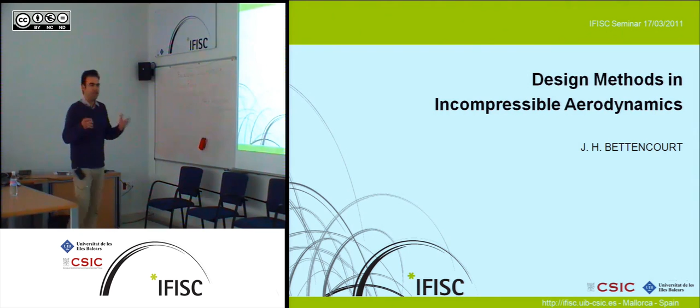Of course, aerodynamics is a very wide research topic, and these design methods are basically what people use to gather research results and make something workable out of it for the design environment. There are 100 years or more of research that's impossible to squeeze into 40 minutes, so I'll just talk about the basics, especially these potential flow methods that are quite old and quite simple, but they are very useful. They've proven to be very useful.

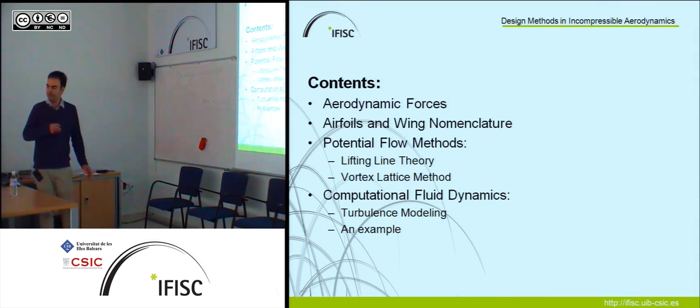Lastly, I'll talk about computational fluid dynamics, which is now a hot topic in aerodynamic design. I'll talk especially about turbulence modeling, because it's like the Achilles heel of computational fluid dynamics. Then I'll finish with an example.

Of course, the problem in aerodynamic design—and I'm a naval engineer, so I work mostly with propellers and ships—but I chose aerodynamics because the equations and methods are the same, and there turns out to be a lot more material on wings and such devices than on nautical applications.

So the problem with aerodynamic design is that we want to find the forces acting on this wing. Here is the cross section. We want to find the forces acting on this wing when it's subject to an airstream with velocity v, at an incidence angle that we call the angle of attack, called alpha. The resultant force is this vector r here.

But in aerodynamics, it's usual that we decompose this r vector into two components. One is parallel to the velocity stream, called the drag, d. The other is called the lift, and it's normal to the velocity stream. The lift in an airplane is what keeps it flying, and the drag is what we pay for if we want to fly it.

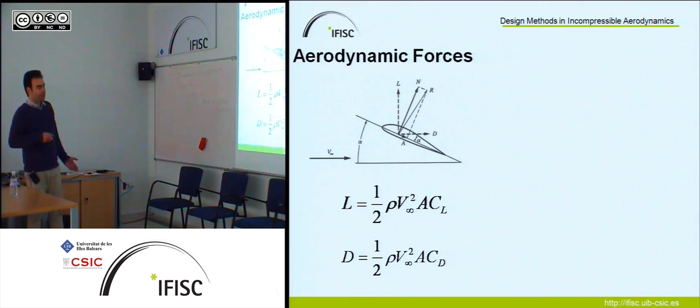If we use dimensional analysis on this problem, we find very simple expressions that relate these two forces to the parameters of the flow and to the shape of the wing. These forces are directly proportional to the density of the fluid, to the square of the free stream velocity, and to the area of the wing, both for lift and drag. But they're also directly proportional to two coefficients that, as it turns out, are the tricky part of these equations.

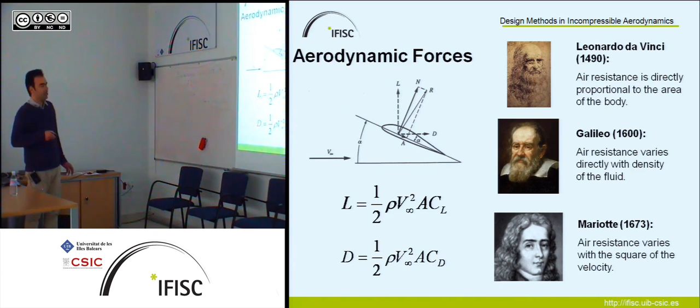Before I go on, I wanted to give a little historical note. We can start, as always, with Leonardo da Vinci, and go all the way up to the 17th century, where scientists were already more or less in agreement about these three terms. Of course, a lot has been done since, but to this day it's still difficult, still tricky, to calculate these two coefficients directly.

Now I want to show you why. These two coefficients depend on the pressure and shear stress distribution over the wing surface. The lift coefficient and lift force depend more or less solely on the pressure distribution. You can see here the physical mechanism of lift, due to the pressure difference between the lower part underneath the wing, where you have high pressure, and above the wing, where you have low pressure. This is called the pressure face, and the top of the wing is called the suction face. This pressure differential creates the lift on the wing.

Of course, we also have this shear stress distribution, which is the stress from the friction of the fluid over the surface. That mostly depends on what's happening in the boundary layer, this very thin region on the surface of the wing where viscous effects are important. So what happens here more or less determines this shear stress distribution.

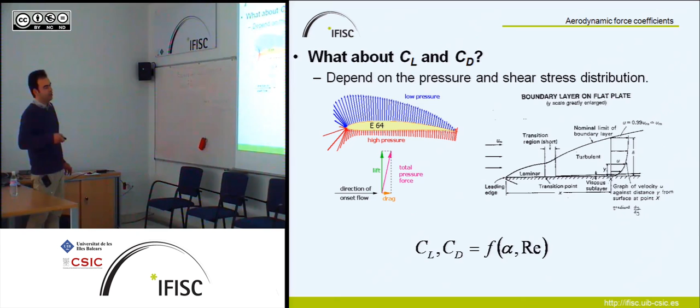Now, to ease things up a little, if we do the dimensional analysis, the same as we did before for the forces, we'll find that these two coefficients are functions of the angle of incidence, the angle of attack, and the Reynolds number. This Reynolds number is mostly related to this part, while the angle of attack is related to both.

Now, before we start, I'd just like to talk about nomenclature.

There is another important parameter about this planform of the wing, which is the aspect ratio, and it's just a measure of how elongated the wing is. And it turns out, as I'll show you later, that it is very important in aerodynamics.

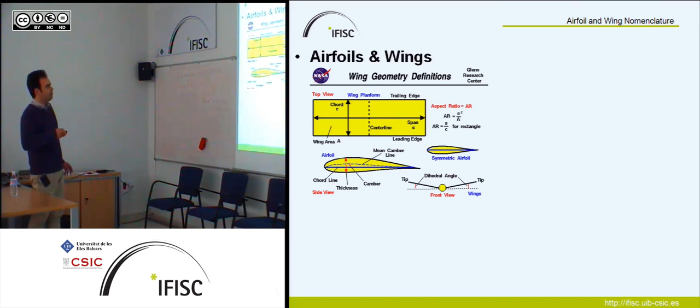Now about the airfoils, they're defined mostly by their thickness distribution. It's the distribution of the thickness around this chord line, and also by the camber, which is just a measure of the curvature of the airfoil. Higher camber means higher curvature.

Okay, now just a short note about how these force coefficients vary in an airfoil. I told you they were functions of the Reynolds number and the angle of attack.

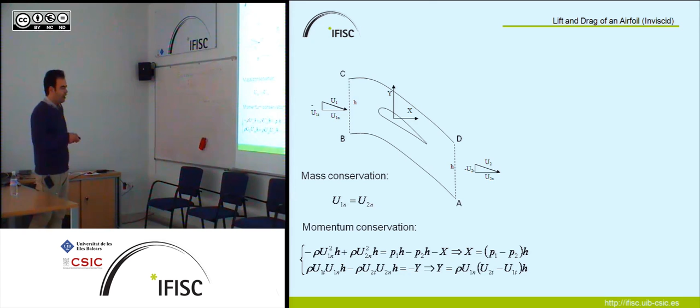If I apply momentum conservation in the x direction, the momentum transport cancels because these 2 velocities are the same, and all I have left is the difference in pressure force, which gives the horizontal force. For the vertical part, since the pressure terms cancel out, I'm only left with an expression that is just the force generated when the flow turns to pass around the airfoil and leaves. If I'm going too fast, please ask me any question.

Now that we have these 2 expressions for the lift and drag forces on the airfoil, I'd like to get rid of these pressure terms by using Bernoulli's law, which is just the conservation of energy along a streamline. I can use this to replace the pressure terms with velocity terms. Now I'm going to define mean velocity components, the mean of the normal components and of the tangential components, and with this I get two expressions for the forces purely in terms of velocity.

Now I'm going to introduce a very important quantity in aerodynamics, called the velocity circulation. The velocity circulation is the integral of the velocity vector along a closed contour encircling, for instance, the airfoil. If we apply this integral to this configuration, we get an expression I can use to replace the terms here, giving a useful result: the horizontal and vertical forces are just the density times the mean velocities and the velocity circulation.

Okay, now we're getting close to where we wanted. So now I'm going to introduce a very important theorem in aerodynamics called the Kutta-Joukowski theorem. We now have these forces, a vertical and a horizontal one, but in the beginning I defined aerodynamic forces in terms of their orientation with respect to a mean velocity. So now I'm going to express these forces in an axis system that is parallel and normal to that mean velocity vector.

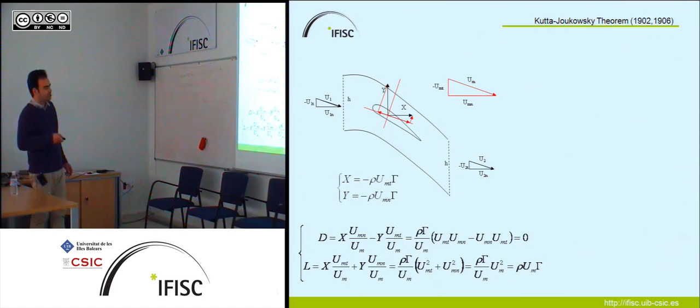Now when I do that, I get this very surprising result: the parallel component is 0, which means the drag of this airfoil does not exist, it's 0, and the lift force is equal to the product of the density, the mean velocity, and the velocity circulation around the airfoil.

Now, of course, this is quite an unusual result, because one would expect that a body in a flow would offer some resistance. This result was first discovered by D'Alembert in 1752, and has since been known as D'Alembert's Paradox. At that time, the effects of viscosity in fluid flows weren't really well understood, so they were a bit surprised and called it a paradox. But now we know this result is 0 because viscosity is discarded in potential flow calculations, and with real fluids that have viscosity, the drag is not 0 at all.

So just to finish this part: note that with this expression and the first expressions for the lift force, I can finally find a value for the lift coefficient. Of course, the drag coefficient in potential flow is 0.

Okay, now moving on to the wings, to three dimensions.

I'm going to introduce this.

It's a very old and elegant theory that Prandtl developed to explain the lift and drag of three-dimensional wings. The idea is that if in 2 dimensions the lift force of an airfoil is related to the circulation around it, then perhaps in 3 dimensions the lift of a wing is related to the circulation around its sections, which are airfoils. So if we can get a distribution of circulation along the span, every section, every airfoil of this wing will have a circulation around it and will be producing lift.

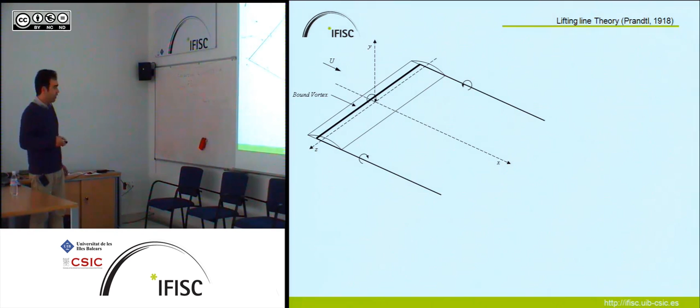So what I'm going to do is make this vortex line extend to infinity by adding two vortex segments that leave the vortex line and extend up to infinity. So what we have here is a vortex line of infinite length starting at minus infinity, going around, and finishing off at minus infinity too. This construction is called a horseshoe vortex.

It's very useful in potential flow theory, but it has a problem. The second of Helmholtz theorems says that the circulation distribution along this vortex line must be constant. That is not what we expect, because if we think about reality and a three-dimensional wing, we don't expect it to have a lift distribution that is constant along its span. Especially at the tips, where the high pressure from the pressure face equalizes with the low pressure from the suction face, we should have zero lift, because there is no pressure difference.

But it turns out that we can actually model a varying lift distribution along this vortex line, just that wherever the circulation changes value, we have to take that change all the way down to infinity.

So what Prandtl did was introduce this set of trailing vortices that extend continually along the span of the wing, and they extend to infinity. The strength of each of these trailing vortices is related to the change in circulation along the wing, so that the whole change in circulation is zero when we account for these trailing vortices.

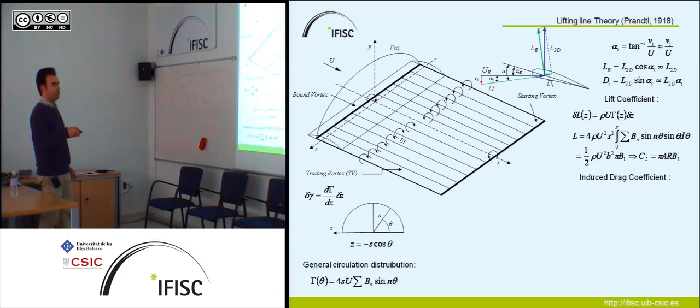You can see that here is the aspect ratio that I talked to you about. I can do the same for the induced drag coefficient. But looking at this formula, I see that I have to know the value of this induced angle of attack. It comes from the induced velocity.

So now, at each point on this lifting line, I'm going to calculate the induced velocity by a single trailing vortex. This is just the Biot-Savart law. To find the total induced velocity here, I just have to integrate all along theta or z. So now I have the total induced velocity.

Now I can use this velocity to find the induced drag at each section. I'll integrate it, with some mathematical steps, integrating along this line, and we get this induced drag coefficient, which is what we're looking for. Of course, a real wing in real flow has viscous drag, but since it's potential flow, we neglect this viscous effect.

Okay, so now that I have these aerodynamic force coefficients, I'm going to show that there is a very, very close relationship between them.

What was B? Capital B, sorry. B, this B1, Bn, they're just the coefficients of the circulation profile you choose. That depends on the design. Actually, there is a method: if you equate some of these equations, you get a linear system that when solved gives you all of these coefficients. But I decided not to show it because it's really just algebra.

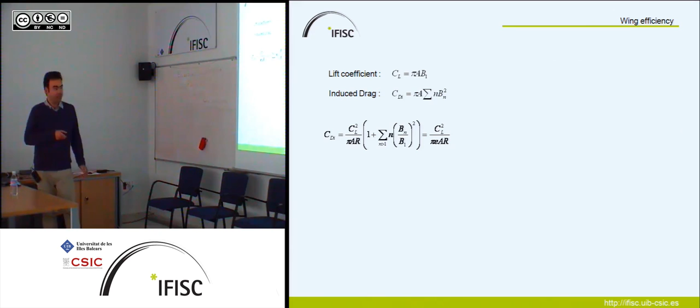Oh, for an airfoil, yeah, it's valid for any shape of an airfoil, but not for every shape of a wing. Okay, that's the shape of wing. Yeah, because you can have whatever shape you want. Okay, but the wing must be rectangular. It must be rectangular and must be flat.

Where does the information of the airfoil go into the coefficients here? Because different airfoils might have different lift or not. Yeah, of course. So where does that go in this approximation? Different airfoils give different lift, and when you solve this system of equations I told you about, this lift of an airfoil will be reflected here on these coefficients.

To understand the difference between 2 and 3 dimensions — so in a wing that is infinite in width, you should recover the 2-dimensional result, is this right? Of course. So is it because you have borders in the wing that the lift becomes reduced, and you get this extra resistance? Yes, that's correct, that's exactly it.

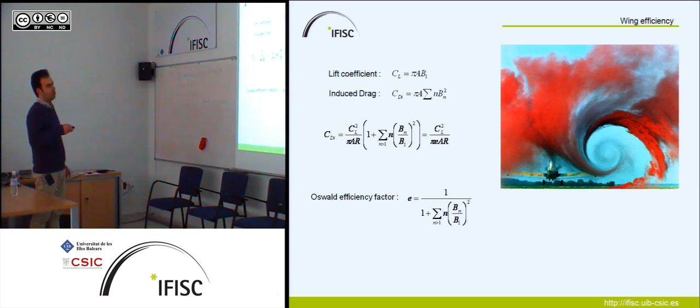So here, this small e is called the Oswald efficiency factor. You see that the most efficient wing would have this value equal to 1 from this formula. And actually you can demonstrate that this happens when the distribution of circulation is elliptic, has an elliptic shape.

So that's to maximize the Oswald factor. Yeah, actually it happens to minimize the drag. It will minimize this induced drag. When it's 1, this factor cannot be greater than 1. So when it's 1, we minimize it, and it happens when we have an elliptic distribution of circulation. It doesn't mean that the wings have to be elliptic — they can have other shapes, but it depends on what you assume.

So this lifting line theory is very useful, but it's very limited because you need rectangular wings, they have to be flat, and they leave out a lot of useful wing shapes used today. So I'm going to show you here another method, called the Vortex Lattice Method. It comes from 1946.

Since it's going to be flying most of the time at 11,000 meters and 900 kilometers per hour, this would be your design condition. So it's a static condition. When we talk about turbulence, it has this very unstationary character, so you have to think about whether it's worth modeling turbulence or not - what effect it will have on this mean stationary condition that we're designing our airplane to. So when you think about this, you can go either way.

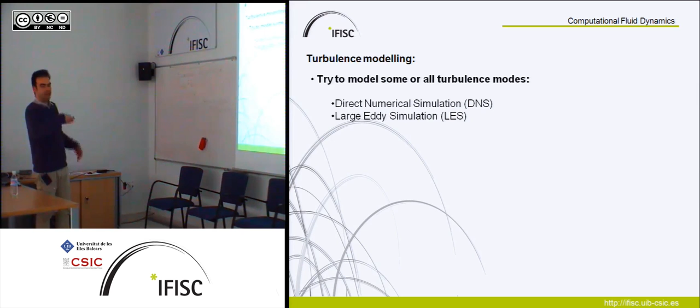Of course, you can try to model some or all of the turbulence modes. You can try to model all the spectrum of turbulence, going into direct numerical simulation or large eddy simulation, where you model just the lowest frequencies, the largest eddies of turbulence, but it's still very heavy computationally.

Or you will try to model the average effect of turbulence on the mean flow, in this 900 kilometers per hour flow. In that case, you would use the method called the Reynolds Averaged Navier-Stokes equations. Of course, it's much cheaper, at least in the first stages of design, to model the average effect of turbulence on the mean flow, than to go directly into modeling all of the turbulence and then extracting the mean information.

That's what you need. Of course, turbulence later on you have to deal with when doing more detailed design. But in the first stages, it actually pays off much better to just model the average effect of fluctuations.

So in order to use this process called Reynolds Averaging, you split the variables into a mean component and a fluctuating component, which should represent turbulent fluctuations. But this fluctuating component has a zero mean.

Now, when you replace this in the original Navier-Stokes equations, you have to do a lot of math, but then you get, for the mass conservation and momentum conservation equations, these expressions. And if you note, all the fluctuating terms have disappeared except for this one here, which is the average of the product of velocity fluctuations.

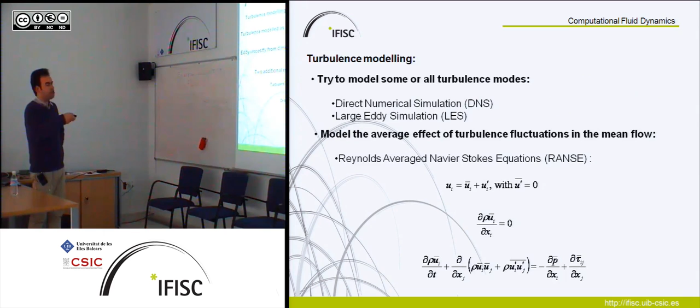So you're using an equation for this one and an equation for this one, so that you can have this one. You put it there, and then you make some operations on the Navier-Stokes equations, and then you can solve for the mean flow.

Okay, that's about the turbulence model. Now I'd like to show you some details. This is what I did in my master's thesis. I did these experiments in a wind tunnel with this wing, just a picture of the wind tunnel, so the flow is going that way. Here's the wing, so we had to vary the angle of attack to get those lift coefficients.

I also modeled it using Computational Fluid Dynamics. First thing you'll note is that here you have a rectangular domain, but here you have a circular domain. This is a question of how easy it is to make a simulation, because if you rotated the wing here, you'd have to build a new mesh each time you want a new angle of attack, which would be very expensive. So instead we use this circular domain, and then you just rotate the velocity vector so that you can get the same angle of attack.

So about the meshes, of course, meshing is something that can take weeks or months to do, and it's very complicated. But I just want to show you that the main thing about making a mesh is that you have to put more elements where the gradients are larger.

In this case, we expected the gradients of the solutions to be larger near the wing and behind it, because we still have wing effects going up more or less here. So here you can see that the mesh density is much higher. And of course, over the wing itself, at the tips where you have flow coming in from below to top, that's where you're going to find the big gradients, so you have to put more mesh elements there.

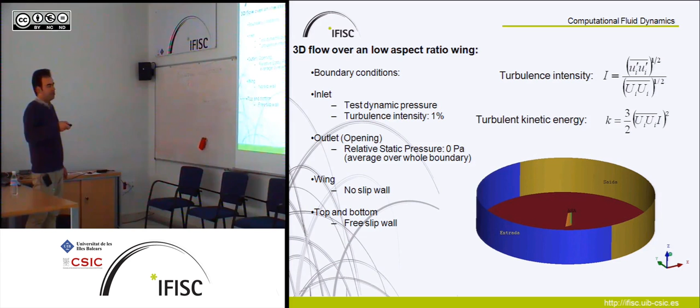And there is supposed to be a top boundary, and at the bottom boundary I use a free slip wall, which is just the contrary of the no-slip. It just means that the flow slips through the wall. It's just to make things easier, because the top is very far away from the wing, so you wouldn't expect the wing to make any effect on the flow here at the top. And on the bottom, you can always simulate it as a mirrored image by using this free slip wall. I'll show you that.

Okay, just to finish, for the turbulence model, what we use is called the Shear Stress Transport K omega model. We didn't use the K epsilon model because it doesn't really give good results when we're talking about aerodynamic flow of wings. This one is much better, so we use this one.

You see that in that kind of formulation I showed you, you just had to replace this epsilon parameter with this omega parameter, which is kind of the inverse of epsilon, but it actually gives better results. Now, to start off the calculations, the simplest thing is to use a uniform flow with just the inlet velocity all over the domain.

Now, there's just a note here, the advection scheme. The advection scheme simply means how the solution is advancing throughout the domain among the simulation nodes. From some years ago, they started to use this high resolution scheme. I can show you more or less how it works. Let's say here that you have a downstream node, and here is an upstream node, and you can relate the values of this variable u between the upstream node and the downstream node.

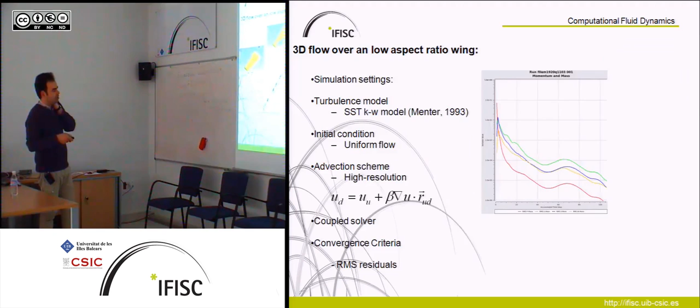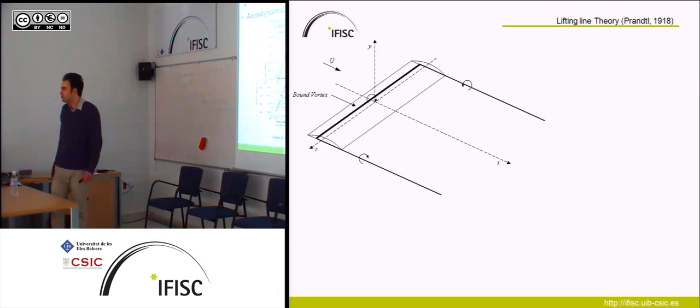So, the second question, also regarding the previous plot - how much... sorry, this is the computer. How much do you estimate is the turbulent effect? Which would be the departure from the potential theory to your turbulent simulation? So, the lift in particular.

That's actually an easy question to answer, though I can't show it graphically right now, but since this line is mostly linear, you can calculate its slope, and from potential theory, the slope of the lift coefficient with respect to angle of attack equals 2 times pi. So if we wanted to know the difference, we could draw a line in radians, with alpha in radians, with slope 2 pi, and see the difference between the lift coefficient in potential flow and what you get using these methods that account for viscosity. There is some departure, because 2 pi would correspond to 1.

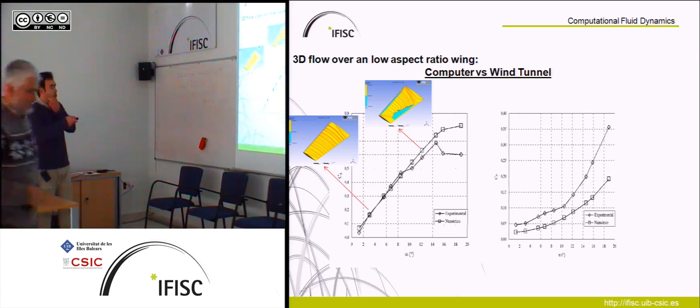The airfoil of this wing was designed to work at its most efficiency at a Reynolds number of 1 million. So we were very, very low on the Reynolds number. Of course, at 1 million we would have turbulent flow to be okay.

More questions? My question is about the length scale - you mentioned you had to input 2 micron separation between grid points. Is this also for this simulation? Yes. And these scales describe the model's representation of reality.

At such a small scale, the micron scale, wouldn't you expect some corrugation or roughness on the wing surface? That's a good point. Usually these models are made to be extremely smooth, with a very small roughness. I don't know what the roughness was here, but perhaps 2 microns - this wing wouldn't be that smooth. But here you have this representation of the surface, so you can make it as smooth as you want.

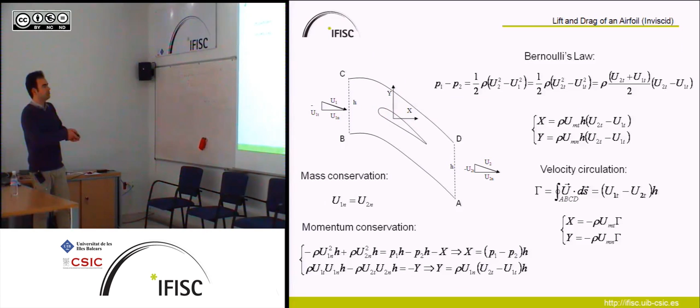And I can show you, for instance, just what you mentioned - this is almost like microscopic scale for matter, no? Micro.

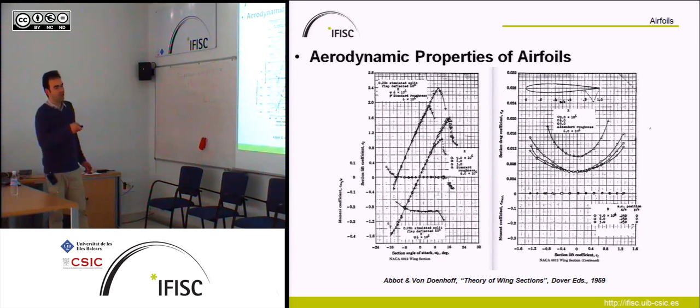You can see here, for instance, this curve - this is the same airfoil, except this one is for a smooth airfoil, and this is for a rough one with standard roughness. You can see that the effect of roughness is to increase the resistance, almost double. So yeah, it's probable that this scale might be relevant, and this 2 microns is probably too much for this reference.

But then again, there's a rule that you have to have at least 15 points inside the boundary layer. It's just that you don't know how thick the boundary layer is, so you have to make estimates. These estimates are based on flow on a smooth plate, so you usually get very low values for the first point.

More questions? I had a couple. In your master thesis work, were you analyzing a special design for the airfoil, or just an exercise - were you computing these coefficients for a special airfoil design? No, actually in my department there were people very active in making radio controlled sailboats.

They wanted to see if this would be a good sail for their sailboats. Not for a wing? Yeah, but actually this is a wing - they wanted to use it as a sail, so they talked to me and I said it sounds interesting to test it. So actually this was for the sail, that's why we have it here.

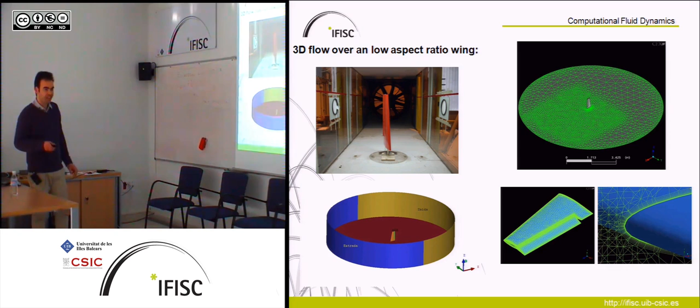You've worked at a couple of companies in the design of real blades and propellers. What methods were you using there, if this can be disclosed? Did you use full direct numerical simulation, large eddy simulation, or this kind of turbulence modeling? What did you do there?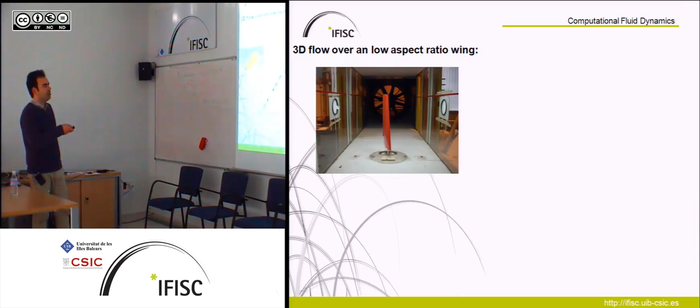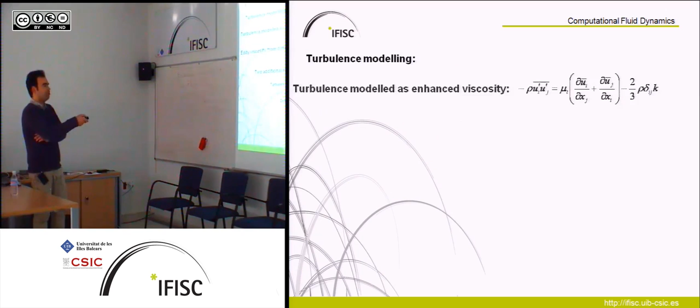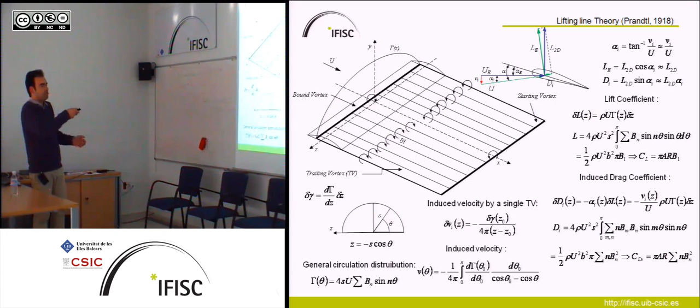It was this kind of computational fluid dynamics modeling with turbulence models, modeling turbulence with some closure. It was on propellers - when you start designing a propeller, you almost always start with lifting line theory because it's very simple, and you can find necessary spans and aspect ratios. Then when you get into more detail, you start using this other method, and you probably end up there. Actually, I was using this method.